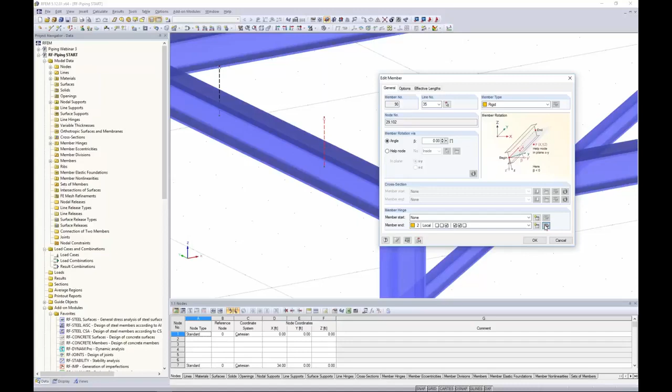What I did was add in a member hinge to the rigid link here to release translation in the global X direction, so that will allow those pipes to kind of slide back and forth in that direction. I also released the moment, so I didn't want any moment transfer between our piping members and the supporting structure, so we can do so with the member hinge on our rigid links.

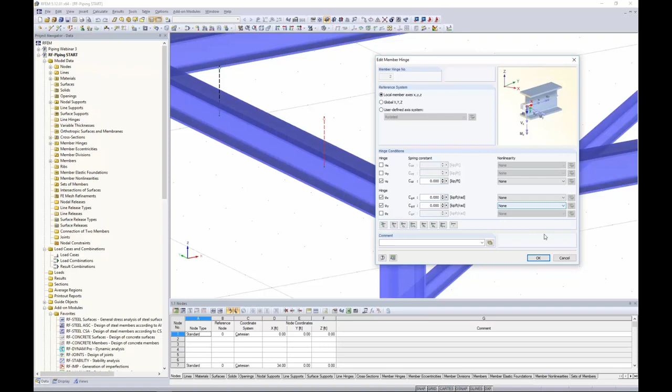Now, taking a look at the rest of the structure, these are just typical W shapes. We can use our project navigator over here on the left to view all of the input data. So for example, the cross sections tree, we can see that the W8x35s are defined for most of our members within this pipe rack. We also have some diagonal vertical bracing, W4x13s. So that's really all that I've done so far.

Now, when you go to create a new model within RFEM, or after you've done, such as I have, created the model, we need to go back into the general data. So what we would do is to right-click on our model name, go into the general data, and under the options tab, you'll notice piping analysis. This option is only available if you've purchased the RF piping module extension.

So here we will check this checkbox, and under the details are some additional settings that we need to define. The first one is to define which standard we like to use. We have the ASME B31.1, 31.3, and recently added is the Euro code. This option down below at this checkbox is for welded forged T and welded in contour inserts. This just refers to a couple variables, RX and TC, that we won't be using today, but just keep that in mind if you are using those type of components.

The default branch connection type, this will make a little bit more sense later on. So for right now, we just want to set this to reinforced fabricated tee, but just keep in mind that this setting is here and I'll mention it later on.

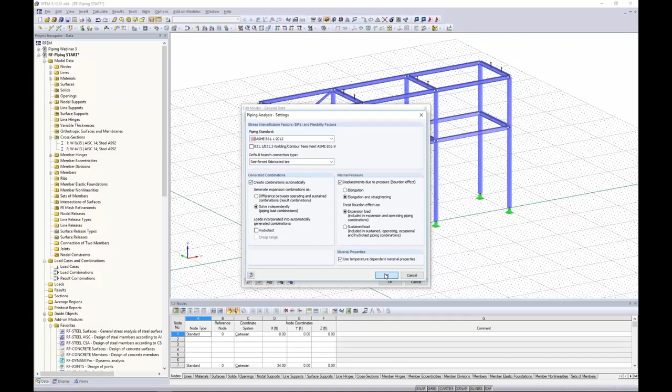When I click OK out of these dialog boxes, you'll notice that I'm still within RFEM, but now I have some additional tools available for modeling piping systems. So we want to begin today by drawing a new pipeline, using this first tool available in our new toolbar. For the pipeline description, we'll call this one main pipe 1, and we need to define a cross-section.

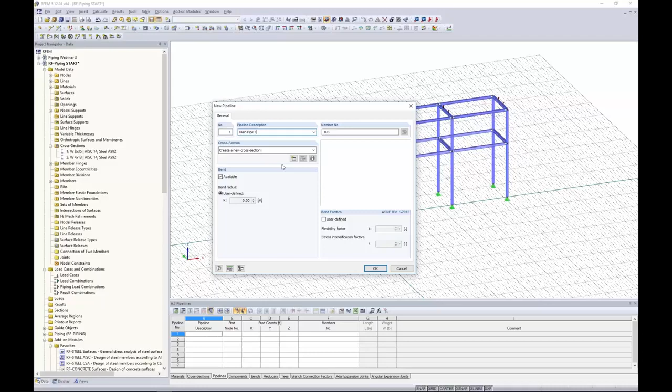With the cross-section, we will go into our database and up pop several different manufacturers and standards. You'll notice that we have the ASME B31.1. We have NPS and DN - NPS is related to imperial units, DN is related to metric. For our first pipe, I want to scroll down to my 8-inch diameter, in particular 8.625, and the thickness of the wall is going to be 0.594.

So I can see my cross-section populated here. If I have any questions about what variables are being used for my cross-section properties, I can open up this info box to see everything listed.

The material is also going to be defined within the same dialog box. Here we will open up our material database. Over on the left we have some filters where we can filter down to the ASME B31.1. These are all the materials listed in Appendix A within the ASME standard, which you can see is quite complete. For today, we will just stick with A53 grade A, and here are all my material properties.

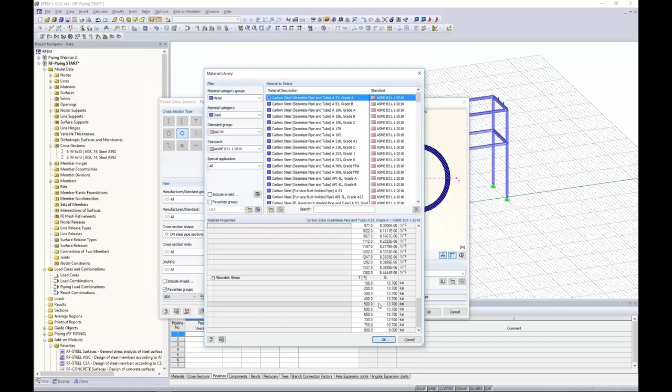This is what I mentioned previously, that as our temperatures are changing, so are our dependent properties such as modulus of elasticity, thermal expansion, and allowable stress. These will actually change with each iteration as long as the temperature continues to change as well.

Now that we have fully defined our cross-section and our material, both listed in that dialog box we were previously in, the line mass here is nothing more than the density of our material multiplied by the cross-sectional area of our pipe to give us our mass per unit length. The total line mass is correlated here just with the line mass we've defined so far, but you'll see this begins to change as we define additional parameters with these other tabs up at the top.

Design data is important because it relates to our pipe wall thickness checks and pressure checks according to the ASME later on. So we want to initially give some design data here that we plan to design this pipe to. For example, if we plan to use a pressure no greater than 500 psi, and maybe design around 85 degrees Fahrenheit, nothing too hot or extreme here.

The second tab is the bend. You can actually create a different cross-section for the bend of the pipeline, different from the straight pipe. This is important for things like thermal temperatures, which create much higher stresses at the bend. So if we wanted to change this cross-section to a thicker wall, we can do so. The rest of these parameters line up just like what we saw in the straight pipe tab.

Layers. We can include layers such as insulation, plating, and lining. For today, we'll stick with applying an insulation, and what we'd want to do here is define the weight of the insulation as 6.37 pounds per cubic foot, as well as the thickness. So we'll add 2 inches of insulation to the outside of this particular cross section.

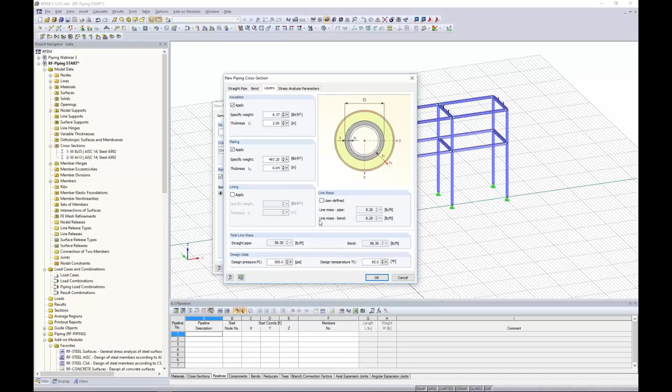We'll also add some plating. For this, the specific weight needs to be quite a bit higher at 497.2, just something that we're given from the manufacturer, and a thickness of 0.04 inches. Now you'll start to see this total line mass increase from what we saw with the first tab because we're accounting for the additional weight from the insulation and the plating.

Stress analysis parameters, well, here you can see there's corrosion allowances, mill tolerances, manufacturing allowances, and welding factors. Again, this is important for when we're checking the pipe wall thickness checks according to the ASME. There are some default settings in here, but by all means, you have control to override those for both the straight pipe and the bend.

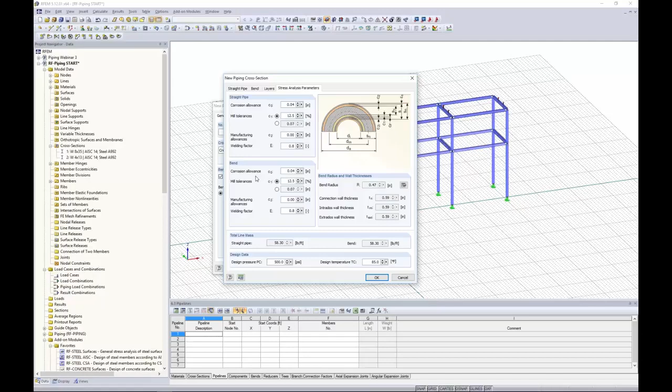Now I can click OK, so we're back to our original dialog box. So we define all the properties for our cross section. Now you'll also notice that we have bend available here. What this means is that as I begin to draw my pipeline back here in RFEM, I can actually automatically create the geometry for the bends. So right now we have it set to the long radius. The bend radius is set to 12 inches. We can change this to short and use 8 inches, or we can choose a user-defined radius here.

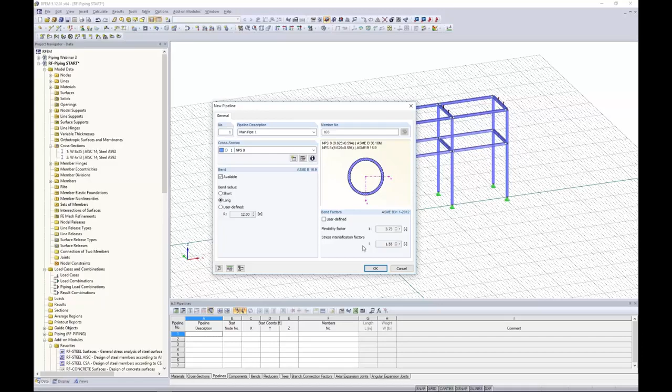The bend factors are calculated from the ASME. The flexibility factor has influence on the bending stiffness of the pipe bend. The stress intensification factor is something that will be used for design later on in our add-on module, RF Piping Design. Again, you can override these with user-defined values as well.

So now that we have defined everything for our first piping member, what we want to do is to begin drawing it. And you'll notice I have these crosshairs available in my graphical interface. What I'd like to do initially is to change the drawing grid around a little bit. So I'm first going to change the plane, and then I can easily select a different origin here, and I'm going to snap to the top of this rigid link.

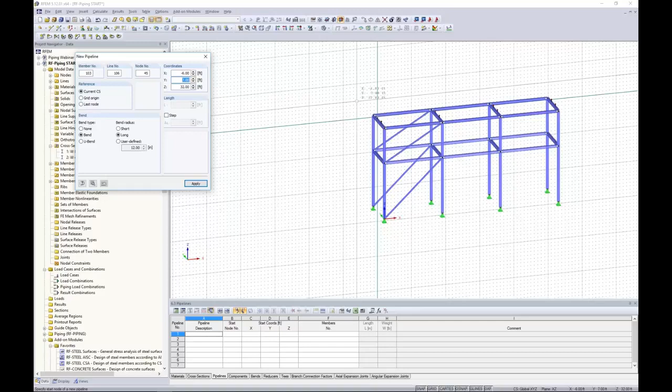So when I go to draw a pipeline, I have a few options. I can choose the current coordinate system, which is what I'm going to do. That will just leave this grid as it is. I can also choose a grid origin or the last node. The last node will dynamically change according to the clicks I make in my model as I begin to draw this pipeline.

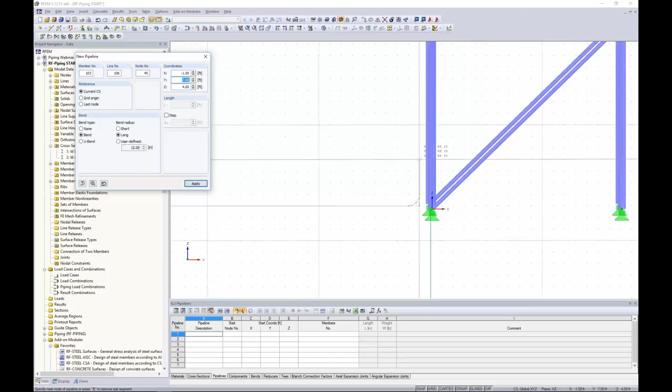So we go all the way up to the top, and we can begin drawing the pipe across the top of the supporting structure. Now, keep in mind that this drawing grid keeps me in one plane, so I don't have to worry about flying off into space anywhere.

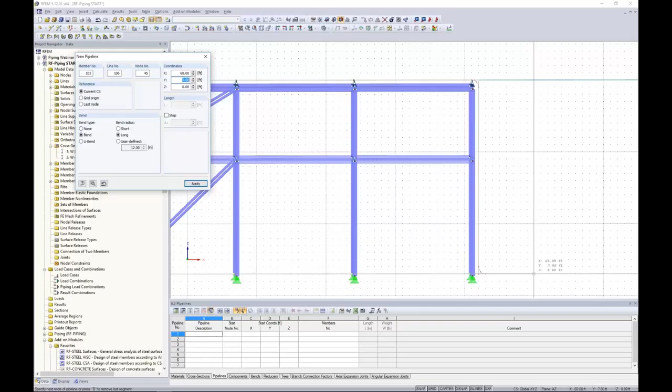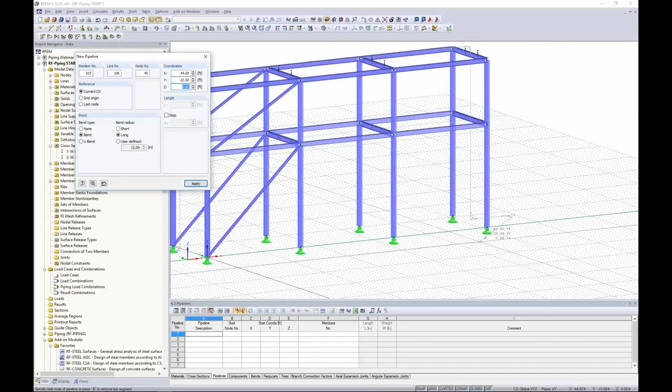Now, when we get to this point over here, what I'd like to take into account is maybe some additional bends to dissipate my heat from my temperature loads. So all while I'm still drawing this same pipeline, I can change my drawing grid back to the XY plane. Maybe I snap back to the bottom of my supporting structure, then I can zoom in and continue modeling my pipeline here with some additional bends.

So once we are done with this, I will make my last final click here, and we'll snap to a point and right click to finish it. And now my piping is complete. So you can see that if everything goes well, you should have the name of your pipe here called Main Pipe 1. That's the description that we gave it.

Now I want to create an adjacent pipe right next to it, and utilizing some of the features within RFEM to make our life a little bit easier, what I'm going to do is to turn this into a wireframe display model. Now I'm going to highlight my important nodes here, the nodes where the bends occur, by holding down my control key and selecting all of these main nodes where the pipe makes some bends.

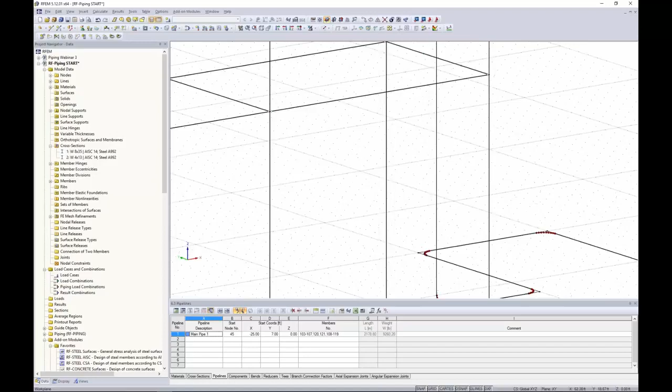So once I have these selected, I can use my Move Copy tool. I'll create one copy and move it -4 feet in the global Y direction. I click OK, and now you'll see those copied nodes are available here.

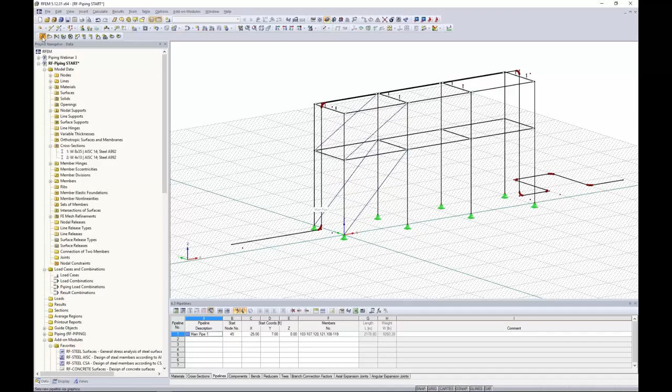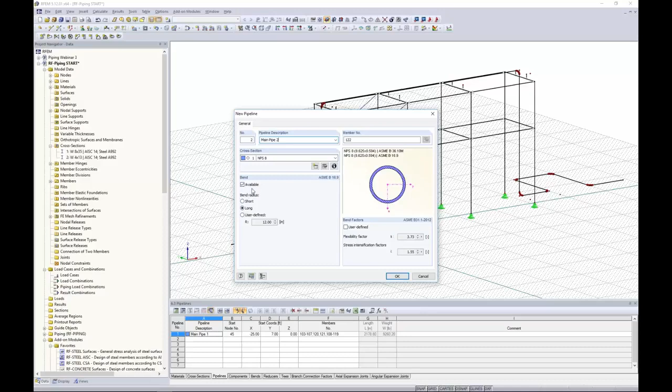Nothing too special. So I'm going to create a new pipeline, and once again this time we'll call it main pipe 2. Now for the cross section, I've already defined that 8-inch diameter pipe with all the insulation and cladding, and that's now available for all my pipelines in this model. So I want to use that same cross section, no need to redefine anything. I'll use the same bend as well, and click OK.

The reason I created those nodes now is that I can easily snap to those nodes here without having to change around my work plane like I did previously. So again, just using some of those special features we have in RFEM to make modeling a little bit quicker, and I right-click to make my last point.

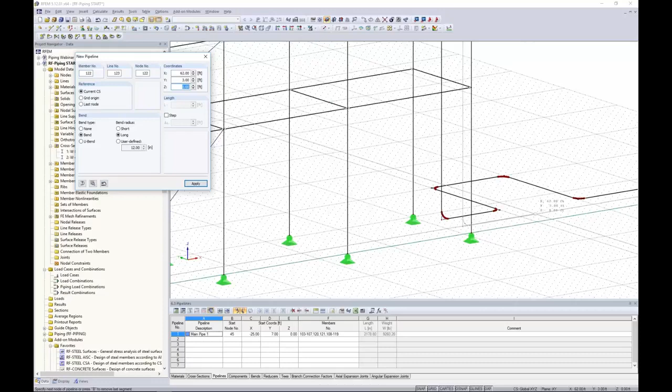Now if I turn this back into rendered view, let's say, oh okay, well this pipe really would like to extend out a little bit further than what I have shown. Instead of redrawing everything, I can take this node and simply drag and drop it so that it's adjacent to my main pipe 1. And again, everything went well.

We see the name of main pipe 2 here. Now the pipes are kind of blending into the rest of the structure, so you can't really tell what's going on here.

Well, under the Display tab in the Project Navigator, this controls everything we view graphically, whether that's input data or our results we'll see a little bit later on. But if I scroll all the way to the bottom, I have this option to change my colors and my graphic according to - right now it's just set to the standard.

We can choose material, cross-section, but we also have pipelines. So when I choose that option, my panel pops up and shows me exactly what my main pipe 1 and main pipe 2 are with different colors, setting them apart from the rest of the supporting structure.

Okay, so what I'd like to continue to do is draw in a couple of straight pipe members, just short segments that frame into this main pipe 1 so we have some intersections. I'm going to go back to the new pipeline - we'll just call this one pipe 1 - and I want to define a new cross-section here.

So up pops our cross-section database. Now you'll notice that we can go back in and filter through this long list. We also can create a favorites group. By activating my favorites group, I've edited it so I've just added the 2 cross-sections I'm using in today's webinar. But you can imagine that if you use a handful of cross-sections quite often, this is a great way to quickly select them.

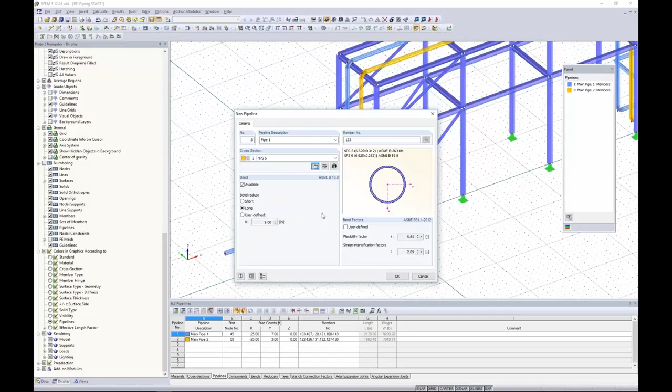So I click OK once more, and I think it's easiest to change this to my current coordinate system and change this to wireframe view. That way I can zoom in here, and my first point I'd like to choose is -15, 7, 0. Then all I need to do is snap to a point which extends out. I right-click - that's my first pipe.

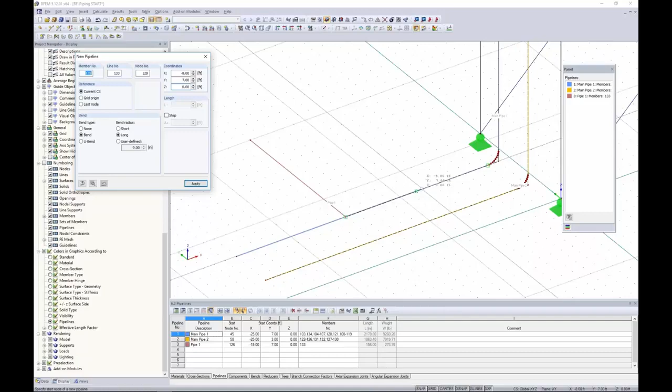Creating once more a new pipeline, we'll call this one pipe 2. I've defined that smaller section, so I always have that available in this particular model. I click OK, and then I can again change this to current coordinate system - that's what I prefer to work with. Here we'll choose -8, 7, 0 and snap to a point out here, right-click. Showing the rendered view, we now see those additional pipe sections shown here, and everything is colored differently so we can tell it apart.

Okay, so now that I have modeled my pipelines, let's move on to the piping components - that was where the rest of these tools will come into play. So the first thing we want to define is a new reducer. When I click on new reducer, the program requires me to click on the pipe that I'm going to apply this reducer to, so I click on this first pipe section here.

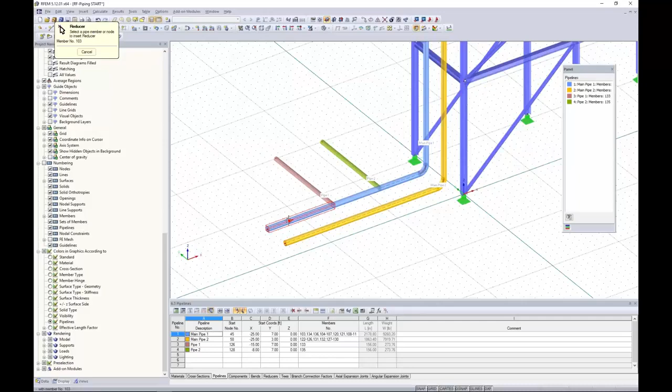Now reducers are used to transition from a larger pipe to a smaller pipe, or vice versa.

Within this dialog box, the first thing I need to define is which dimension to change, towards which node. This is actually opposite of what I want to do right now, so I'm going to click on my beginning node here.

You'll notice my reducer start, perhaps I can choose that smaller cross section we've already defined, or you can create a new section. The reducer end is grayed out because this is going to transition into the pipe I already have defined.

What I do need to define is where this reducer starts. So we'll start at about 48 inches from the start, and you'll notice this big red arrow pops up exactly on the pipe of where we're going to apply this reducer. The length can also be applied at 12 inches, and there's our second red arrow showing us where the reducer end is.

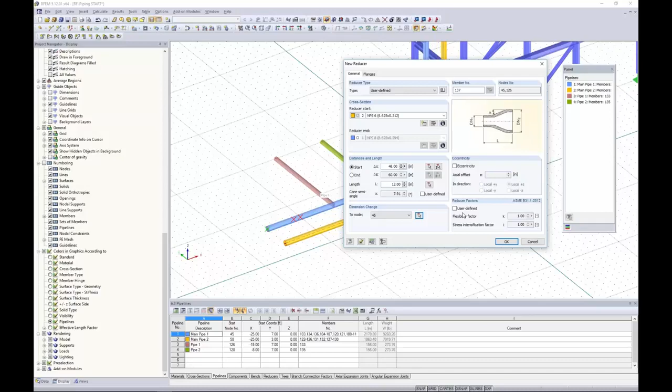You can also define an eccentricity here. Eccentricity would be useful if you want the bottom of the pipes to be flush. In our case it doesn't matter, so we'll keep this as is. Again, the reducer factors can be overwritten here if you'd like to do so.

Now, for a lot of these components, we do have a library. Unfortunately, this library is more relevant to Eurocodes and European manufacturers. This is something we do plan to implement for some U.S. manufacturers in the near future, but for now it's easy enough just to set this as user-defined.

For flanges, this is where maybe we would weld flanges to our pipe and bolt them together at this reducer location. Now, I'm not going to apply flanges, but we'll do this plenty more times with other components today, so that will be more clear in just a minute.

And I click OK. Now if we zoom in, we can automatically see that reducer applied here with the smaller pipe section on the left.

Moving on down our list here, we have three options for valves: a two-way valve, a three-way valve, and a four-way valve. Pretty self-explanatory - a two-way valve is used for two pipes connecting together, a three-way valve is an intersection of three pipes, and a four-way valve of four pipes.

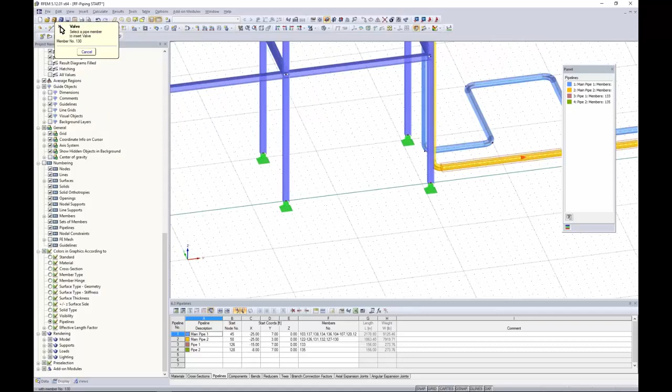So starting off with our new valve, just two-way, we're going to move to the other side of our model, and in particular main pipe 2, we're going to select this pipe here. So up pops our dialog box for a new valve.

Now again, we just want to specify where this begins, so we'll start at 12 inches from the member start, indicated by my red arrow here. The length will be 12 inches, and we have some parameters here that are automatically created, such as the multiplier of the insulation mass set to 1.75.

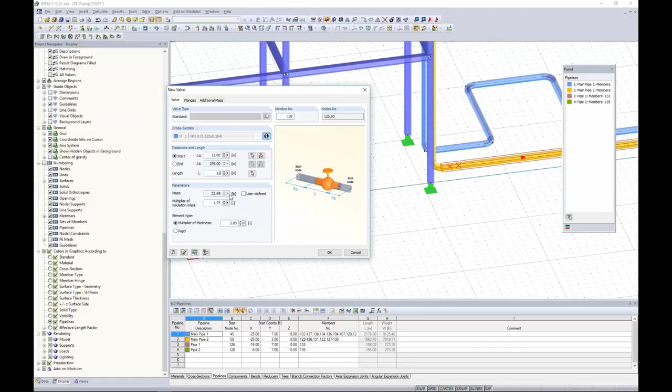The multiplier of thickness is set to 3, so you can override those. That ultimately affects our mass here, or you can set a user-defined mass as well.

The flanges - this is where maybe I do want to apply some flanges. We're going to plan to weld those flanges to both the valve and the pipes and bolt them together. So for our flanges, we want to check the checkbox that those are both available.

Our nodes are automatically generated here of where that flange is going to occur, and we can simply define the mass of our flange as 16 pounds, and maybe the nominal pressure is 232. Again, this is just information that we would get from a manufacturer.

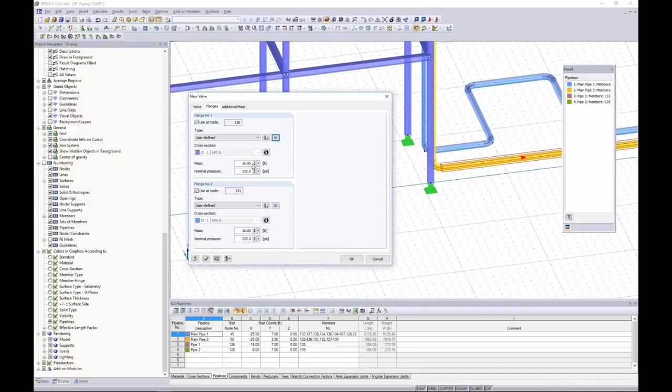What's also nice is that I don't have to re-enter this information, but yet I can just set to all. This will automatically populate the same flange settings for my other node.

Now, the additional mass tab here is useful for our hand wheel if we have an additional mass we'd like to take into consideration, as well as the eccentricity away from the original flange. So something to keep in mind there.

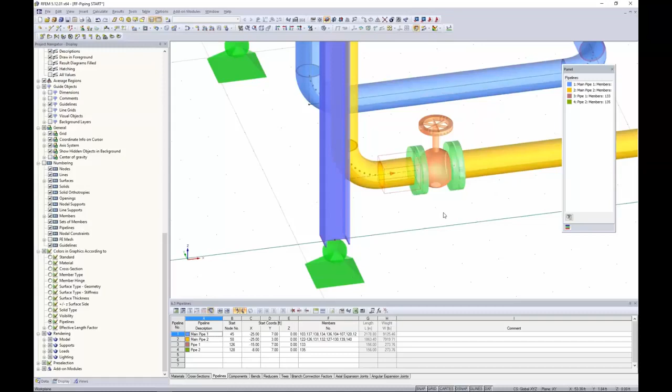Now, once I click OK, we can see here that flange is automatically created visually and will be taken into account for stiffness, for analysis, and for design. So that makes sense for our two-way valve.

Now, in a similar sense, we will apply a three-way valve. So for a three-way valve, instead of selecting a pipe, we have to select an intersection. I select this first intersection here where we have pipe 1 framing into main pipe 1.

The cross sections are automatically generated according to what we have modeled in RFEM, and we want to give it a length for all three piping components here, 12 inches.

Again, our red X indicates where that occurs. Parameters, same thing that we saw within the two-way valve. We have a multiplier of insulation mass, multiplier of thickness.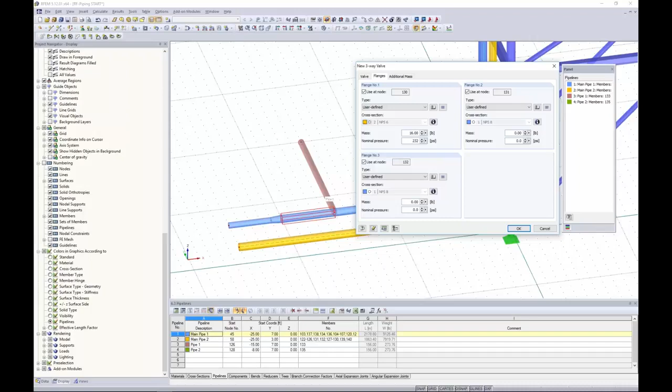Our flanges here, we do want to create flanges at all locations. Again, this will be 16 pounds, 232 psi. Now if I try and set this to all, you'll notice that nothing happens for my other two flange entries. The reason why is because we have a different cross-section defined here.

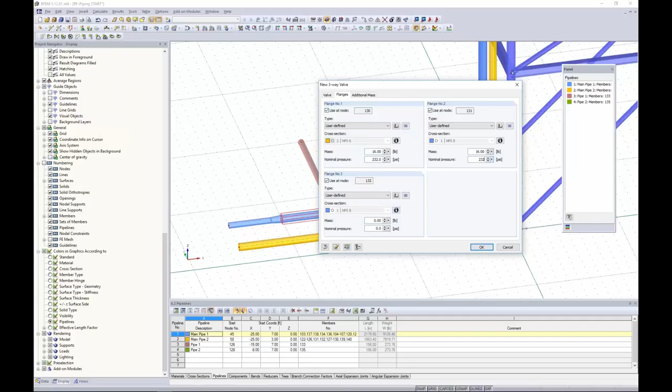The program will only automatically assign the flanges to the same cross sections. So if I move over to my 8-inch diameter pipe and I type in 16 pounds and 232 psi, and I click equals, that will set the flange for the third node automatically.

And again, the additional mass can be considered with the hand wheel here. So once I click OK, then we should see that three-way valve generated graphically. So that's what a three-way intersection would look like.

Now, four-way intersection, same concept. We don't have any intersections of 4 pipes here, so we won't be applying that today.

Right next to that is the new bend. A new bend is useful had I not created, to automatically create the bends when I drew in my pipeline. So perhaps these two elements here, these two pipes connected at a 90-degree angle, and I wanted to go back in afterwards to create that bend. You can always do so with the bend tool up here, define the radius, define a different cross section if you'd like as well.

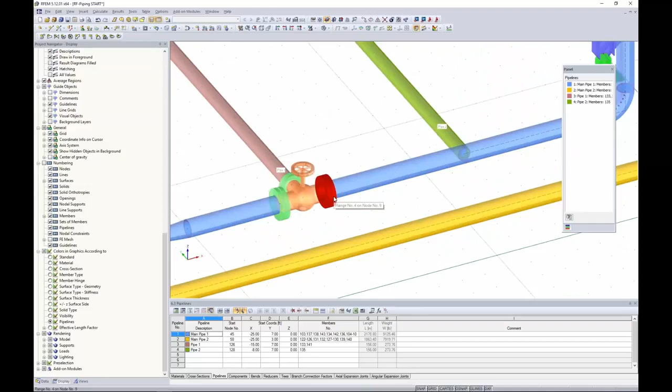Next to that is a new flange. This has nothing to do with some of these other components, but you can purely apply just a flange to any segment of a pipe. This might be useful if you have 2 extremely long pipes and you would like to add in a break there and they're bolted together with a flange. You can do so by adding in that flange.

We also have a new blind flange. This would be able to block nozzles and piping ends. So for example, we could add a blind flange here at one of our piping ends.

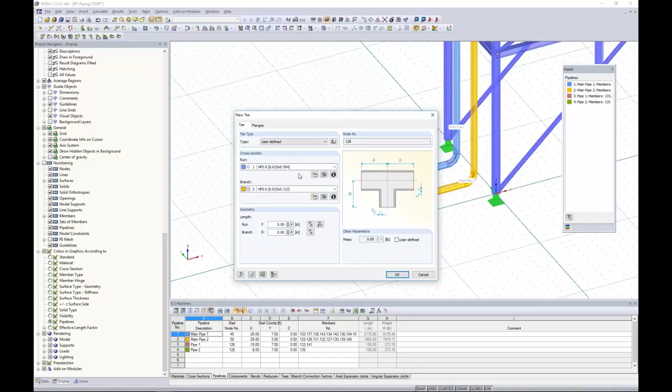A new T. So a new T would be an intersection of 3 pipes, such as what we see here with our pipe number 2. Nothing too fancy with this. We have the cross section defined with the run. The program automatically assumes that's our 8-inch pipe, and the branch is going to be the smaller 6-inch pipe. Then we just simply define the geometry, and again we can add flanges here.

For our case, instead of doing this, I'm actually going to apply a new branch connection. So again, I click this intersection. Now with the branch connection, remember back in the general data, I said that we had to set a default option for the connection type. Well, that's where this comes into play.

So we set the reinforced fabricated T so that automatically when I jump into this dialog box, this is what will always be automated. Now if I use something else quite often, then you probably want to go back to the general data and change that default value. You can always come in and individually select them as well. So for us, we're going to choose a reinforced fabricated T.

All of our cross-section dimensions and factors are automatically calculated here, but what we do need to define is the thickness of our reinforcing pad or saddle thickness. This is important to just give the pipes some additional reinforcement here or thickness at maybe where we have some high stress locations. For today, maybe we put in here a 1/4 inch thick saddle thickness and weld that directly to our pipes. Once that's done, I click OK.

Now this is indicated graphically with just a ball at that intersection. As far as the other 2 options here for axial expansion joints and angular expansion joints, I will get into that later after we do design. So for now, we'll continue to move on.

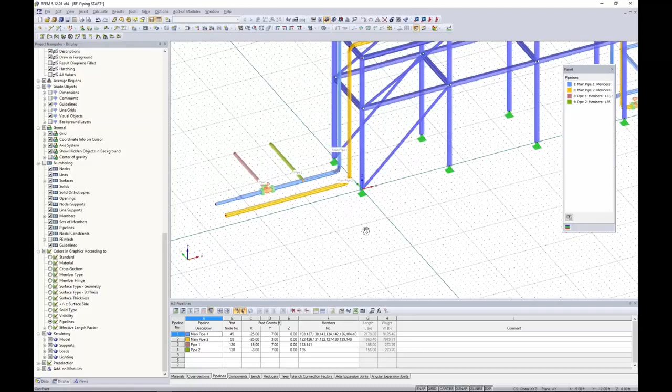So before we can start loading our structure, we need to support it. Just like we support our before we begin loading our piping members, we need to support them. So just like we supported our supporting structure here, you can see at the bottom of the columns we have nodal supports. We have to do the exact same thing to our pipe elements. So we don't have any additional features for supporting the pipes. It's just what you would use in RFEM for all the rest of your members as well.

So in our case, we want to create a new nodal support. Now with a nodal support, we have 6 degrees of freedom, 3 degrees in translation, 3 degrees in rotation, that we can fully fix or fully release.

We also have a spring constant here. So if you have something that's not fully fixed, not fully released, but somewhere in the middle, you can define a spring constant and you'll have partial fixity.

Lastly, we can define nonlinearities. It's not uncommon that for a piping support, you have some type of friction support, dependent on your normal forces. You can define all that with the nonlinear capabilities within the program. I'll repeat this again, but the nonlinear supports is something that cannot be taken into account with result combination, so just keep that in our heads, but we'll revisit that later.

So for today, we want to use just a typical hinge type application, one of the default options within the program. I click OK. So what I'm going to do here is simply click at the ends of my pipes to support those with that basic nodal support.

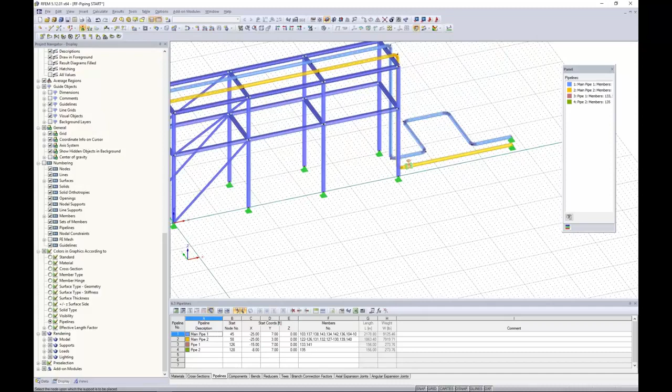In a similar concept, going back to my nodal supports, I'd like to define a new definition, and this time I want to fully release it in the X direction, so some type of roller support that allows translation in the global X direction. I click OK, I click OK.

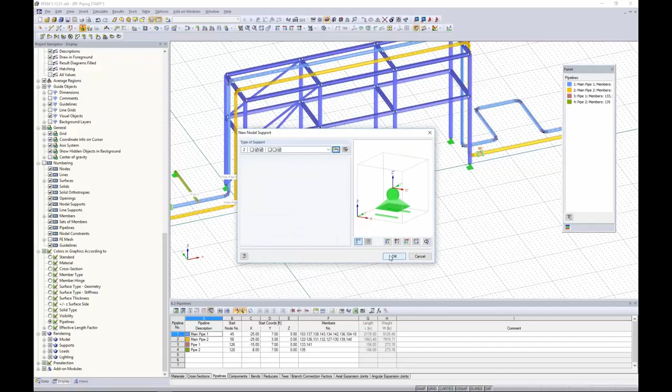So now for this type of support, I'm going to turn this into wireframe view and zoom in here. These will want to be applied right at the bends of the pipes. Now I'm not applying it at this node, which kind of indicates where our bend occurs, because this node doesn't technically lie on the piping member. We need to apply it directly on the pipe.

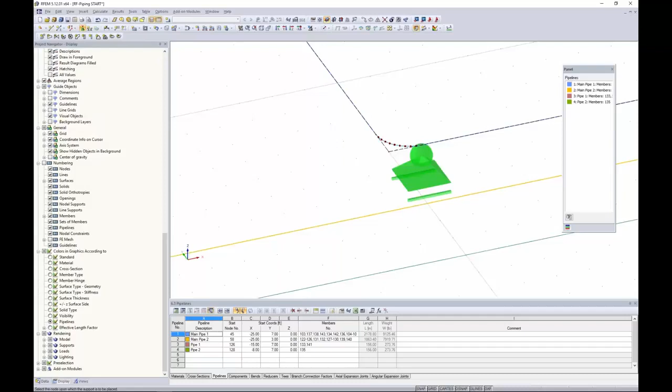So for this, I'm just going to highlight these nodes right at the bends on both sides. And once we've completed on the right side of the structure, we'll zoom in to do this on the left side.

Now, once more going back into the nodal support, because I've defined these new nodal supports, I can always select them within my drop-down box here, but I want to create one more definition, and we're going to release this in the global Y direction. So this will allow movement in the global Y as a roller support.

I click OK, and that's where we want to apply this to our pipes up here where we added in these additional bends. Okay, so now our structure, including our pipes, are fully supported.

What I'd like to move on to now is loading of the member. So for this, we want to create some additional load cases. I go to add a new load case, and up pops my load cases and combinations dialog box.

Now, for those of us who are familiar with RFEM or structural design in general, we of course have action categories according to ASCE 7 or the NBC, according to live load, dead load, wind load, and so forth. But when you have the RF piping module activated, you'll notice several more action categories available here for our piping load combinations, such as piping self-weight, fluid, pressure, snow, wind, even cold springing, hanger, hot loads, and cold loads.

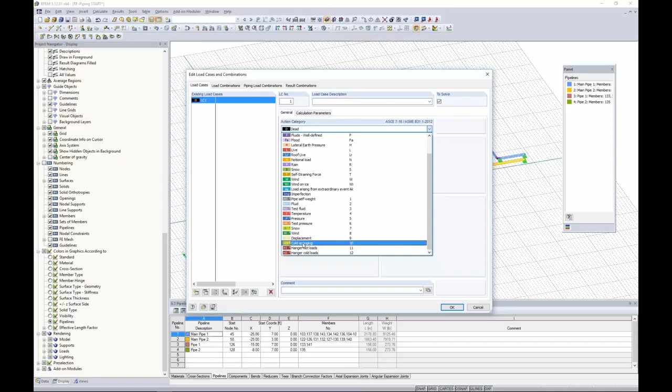So for our first load case, we will define a pipe self-weight. We'll give it the name pipe self-weight. The self-weight will be activated here with this checkbox as -1 in the global Z direction.

Now we create a new load case. We uncheck the self-weight because we don't want to account for that twice. This one will be for fluid, and we'll call this one pipe fluid.

We create another load case. This time we will name this one temperature 1 and assign the appropriate action category. I can make a copy of these as well, so now all I need to do is redefine temp 1 to temp 2, creating another load case such as pressure, and we'll call this one pressure 1. Making a copy, we'll call this one pressure 2. So now all of our load cases are complete.

I've applied no loads, but I've just defined the load cases that eventually those applied loads will fit into. So now I want to take a look at my piping load combination.

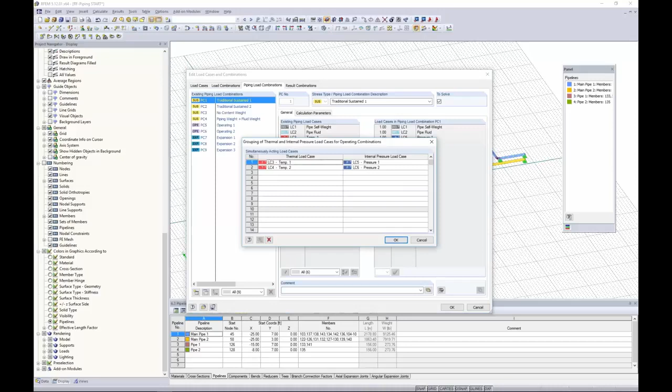So when I try and click another tab, I automatically get this RFEM question. It tells me the load cases were changed. Not all internal pressure load cases have been assigned to corresponding thermal load cases. Do I want to do this now? Yes, I do. So now up pops an additional dialog box, which simply assigns my temperature load cases to my pressure load cases.

Now the program makes some assumptions here, but if I don't like these assumptions, I can always use my drop-down to make changes, or I can add in some different combinations here. So that's important for our load combinations.

Under the piping load combinations, we see some automatically generated load combinations, such as for sustained, for operating, and for expansion. These are the various stress types, and they are incredibly important because this tells the program, once we get into design a little bit later on, exactly what load combinations to use in each of the particular sections of the ASME code for our stress checks.

Now, had I chosen to create these load combinations manually, I still need to assign a stress type. Again, it's important for our ASME code design later on.

When we take a look at the sustained, take a look at self-weight, pipe fluid, pressure, maybe no content weight is just the self-weight. We also have the operating, which is going to be all 4 load cases acting at once.

Now we get into the expansion load cases, and this is something that is very important and relies on our settings and our general data. Remember how I said we're not going to create result combinations, but rather we're going to create only load combinations. This has to do with these expansion loads.

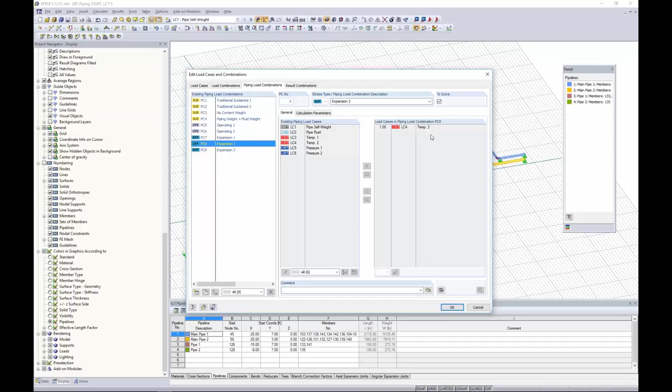When I take a look at these expansion loads, they are nothing more than just the temperature loads applied. So then I'll be doing my expansion stress checks within the ASME according to just simply this temperature load applied.

In turn, what I'd like to show you is if we go back to the General Data tab, under the data, we scroll up to our name, we right-click under General Data to go right back into where we started. Here, I'm going to quickly change this to result combination. Now remember, material nonlinearities cannot be taken into account accurately, so you'd probably want to uncheck this if we're using result combinations. And I can click OK.

So going back into my load cases and combinations, looking at my piping load combinations, you'll notice my expansion loads are now gone. Those load combinations are not being generated here, but rather they're now under the result combinations. So how is this different? Well, it's still called the same expansion 1, 2, and 3.

But now when I look at the details of this, what's happening here is I'm taking my load combination PC5, which is my operating 1 load. I am subtracting out, indicated by this -1 sign, PC1, which is my load combination for traditional sustained.

So to make this a little bit more clear about what's going on, let's go back to our piping load combination. We're taking PC5, which is all 4 load cases applied at once. We're going to get the stresses and everything from this. Then what we're going to do is subtract out the internal forces and in turn the stresses that are generated from this traditional sustained, which you'll see is all 3 load cases, but temperature is not included. So all we're left with is just the stress generated from the temperature.

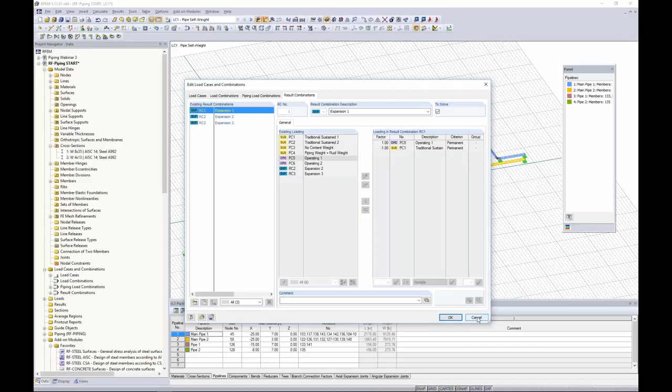So for today, what I'm going to do is go back into my general data. I'm going to change this back to solving independently because I am using my temperature dependent material properties. Okay, so now that we have these load cases defined, you'll find those in our drop-down box available up here in our toolbar.

We want to begin loading the pipes. So we'll start off with pipe self-weight, we'll just leave this as is. We won't apply any additional loads. Now the piping fluid. What I'd like to do is select all my members to apply the piping fluid to. Right now it's kind of confusing with my supporting structure.

Under the Views tab, we have some generated views that, as we began to model, the program generates these. One of those options is the pipelines tree here.

So what I can do is check this checkbox, and now my supporting structure I can no longer select - it's not visible. What I can do is make changes and select all of my pipelines. So that's a useful feature, this Views tab, if you're looking to highlight various options within your model.

So I'm going to highlight all of my members here and apply a new member load. Member load is exactly what you think of it - we can apply a force along a member, but for this particular application today for our pipes, we want to go under extra. Under extra, we have the option for pipe content full, where we're assuming the pipe has all of the fluid contained fully, it's completely full, and all we need to do is give it a specific weight.

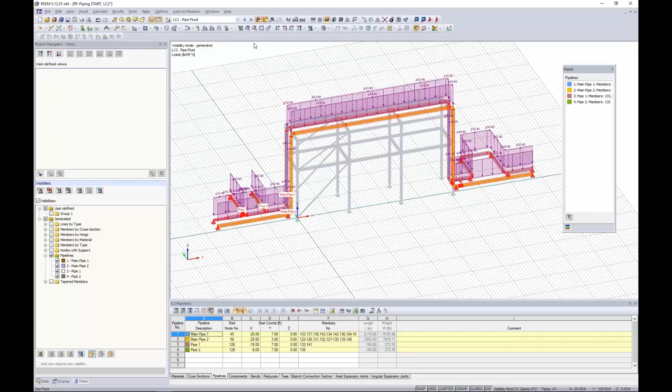I click OK, and now visually I can see this load being applied to all of my members here. Now I changed my load case up at the top to temperature. My members are still highlighted, so we go back into our new member load and apply a temperature - here we specify perhaps 65 degrees Fahrenheit, nothing too special, and I click OK. Graphically we can see this temperature load applied to all of our pipes.

Moving on to temperature 2, same concept - all I'm going to do, since the program remembers my settings from last time, is change this to 85 degrees. Again, nothing too extreme with our temperatures for this example today.

Pressure, again a member load - under extra we have the option for pipe internal pressure. Here you can see an outward force will be acting from the interior of our pipe, and we just need to define a magnitude. This first pressure will be 145 psi. I click OK, and just like before, I can now see that 145 psi applied to all of my members. Lastly, one more load for pressure 2, just changing the magnitude here to 218 psi, and I click OK.

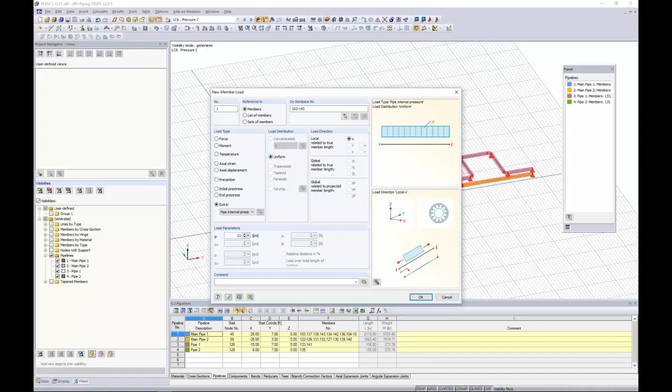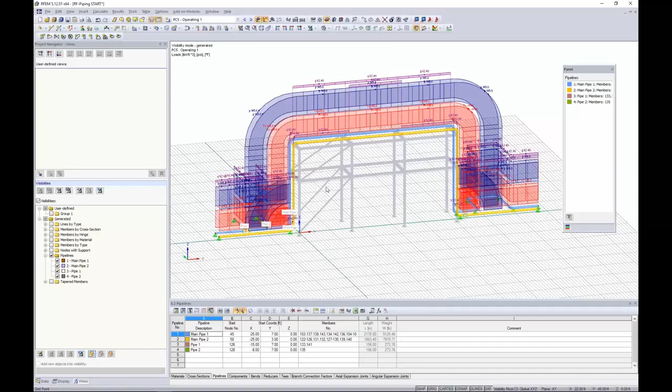So now these loads are done, but what's nice is that not only can I scroll through my load cases, but maybe I'd like to take a look at some of my load combinations. For example, operating - this is with all 4 load cases acting at once. So I can see those loads stacked on top of one another and exactly how they're going to be applied visually to my particular members.

Okay, so now we're ready to run a design for the ASME. We've fully loaded this structure, fully supported it, and added in all of our piping components. Everything looks to be good.

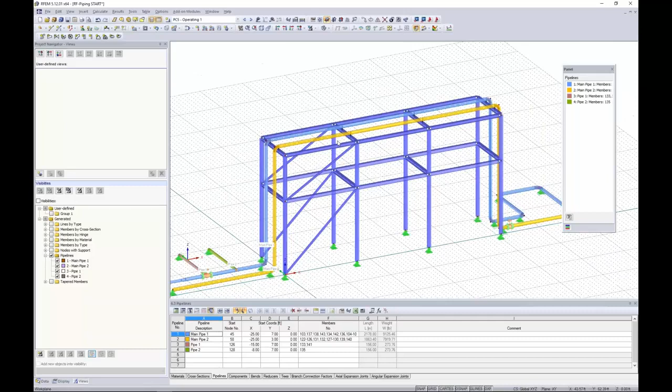So now what we'd like to move on to is back under our Data tab. You can see here our long list of add-on modules, and in particular we would like to be in RF Piping Design. Now any one of these modules you can right click and choose to be your favorite, to move it up to the top of the list. So we're going to launch RF Piping Design, design of piping. Now this is just a simple dialog box - those of us familiar with RFEM, this module looks like all the rest of them.

So what we would like to first define here is the pipelines to design. I can simply select my all checkbox, so now we'll design pipes 1 through 4.

Now the standard can also be selected, not here but back in the general data tab. So this is a little bit different than some of our add-on modules - that standard has to be generated within the general data. We did select B31.1. I'm going to move all of my load combinations to be considered for piping design, so you can see here my sustain and my expansion loads will be utilized appropriately within the ASME.

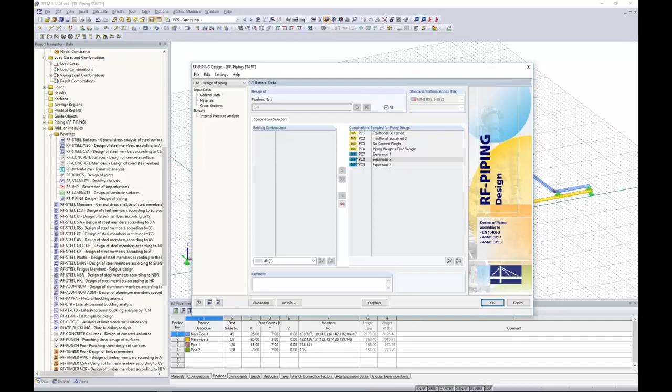Now moving on down the list, I have my materials - this is my A53 brought in from RFEM, so I don't have to redefine that. What's further defined though are just some of those material properties if I'm curious to see those again.

Cross-section, same concept. Those are brought in directly from RFEM. I don't need to do anything further with these here. Here are my cross-section properties given to me again.

Now, you'll notice that I actually have results available even before I've run a calculation within the program. So this is checking our wall thickness and our pressure, doing a couple checks from the ASME, all again without running a calculation. So how is this possible?

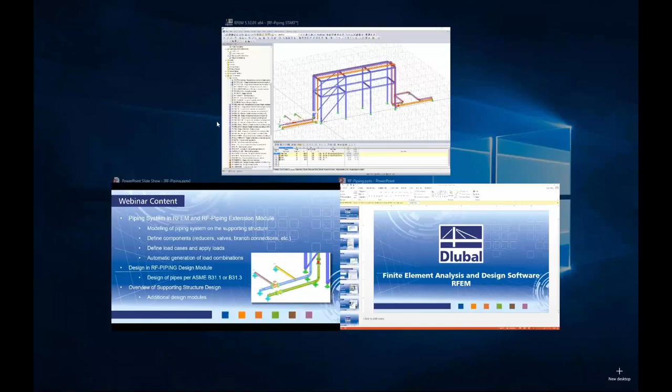Well, for this, I want to jump back to the PowerPoint. This section within our RFEM add-on module is called Internal Pressure Analysis. It refers to the ASME B31.1, section 104.1.4. This allows us to check the minimum wall thickness for pressure and temperature. So that's what these equations are given within the standard, equations 11 and 12 at this section.

Now there's 2 equations here, so we have some variables that we're looking at. Now the first variable, P, is going to be referred back - remember when we created our cross-section and I said, let's give a design pressure here. So this is what I'm telling the program: I plan to design this pipe for 500 psi or less. That value, this design pressure, is going to be utilized within these equations, P.

Now we also have some other variables, capital D sub naught, that's going to be our outer diameter, and we have smaller d, which is going to be interior diameter. So that's why there's 2 separate equations here.

We also have SE, which refers to the max allowable stress based on our material for our particular pipe. We have a couple other variables, W and Y, which is the weld strength reduction factor and the coefficient directly from the standard. Both of those are dependent on temperature. So again, this is why we defined a design temperature, because these coefficients may change as well as some other parameters depending on what our design temperature is.

So we cannot exceed this max design pressure, which will double check that to what you have entered in here for your cross-section parameters. So those checks are kind of going on here within RFEM, our add-on module, before even running the calculation. You'll notice here I have both my 8-inch section and my 6-inch section. We will check it for both the straight pipe and the bends, because there are different checks for bends as well. We give you the code references.

So here you can see the wall thickness check, we have a ratio for that. We also have our design pressure check. So we will check both of them for you before running that calculation.

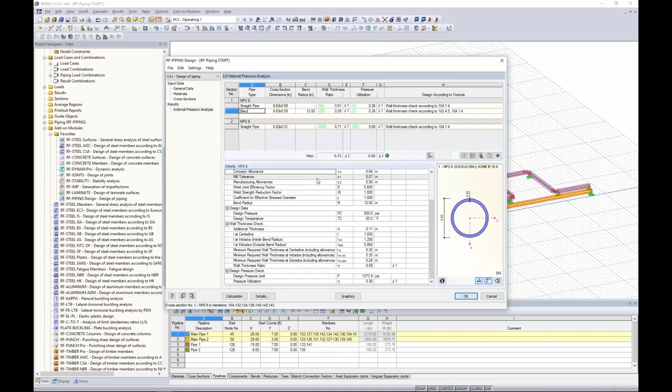Now, before moving forward with the rest of these stress checks, I want to visit the details button here, which brings up our additional detail settings. So most of this is just some further details that we specify according to the ASME, such as the number of thermal cycles. Now, we always give a code reference here, so you can quickly look that up in the ASME B31.1 to understand what exactly am I setting here.

The occasional load factor K, you can see here we have some different settings. 1.15 is going to be used for loads acting for less than 8 hours and less than 800 hours per year. 1.2 would be used for less than 1 hour and less than 80 hours a year, and 1.0 would be the most conservative. We use 1.15.

Corrosion allowances, we have two options with this. So those corrosion, mill, mechanical allowances can either be applied to the stress calculations according to the standard, so whatever the ASME tells us to apply it to, or to all stress calculations, which, as the program tells us here, is a more conservative approach.

Couple more stress options. Again, we can just refer directly to the standard to take a look at these. We'll leave them as default. Something recently added is hoop stress, calculated using either the inner diameter, but you can see that we also have the drop-down box to use the mean diameter or outer diameter.

We'll just leave this as inner diameter. Now that we have defined those details, we can move forward with our calculation to see if everything will hopefully work okay this time.

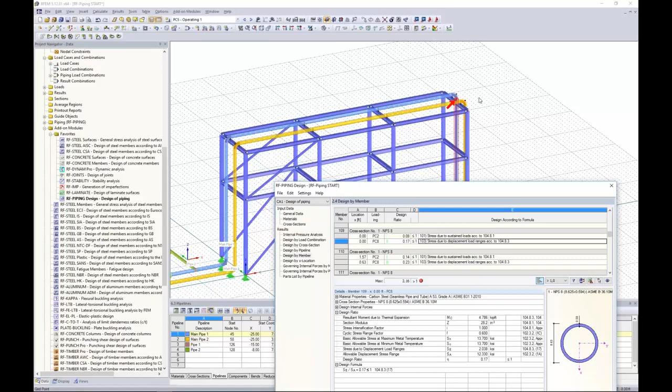This big red arrow is going to show you exactly where the controlling internal force for that particular stress is located. Maybe in our model today not so helpful, but with a very large model, this will be extremely helpful if you're looking at this big giant table and want to get an idea of where you're at within your structure.

We also have a parts list by pipeline material takeoff.

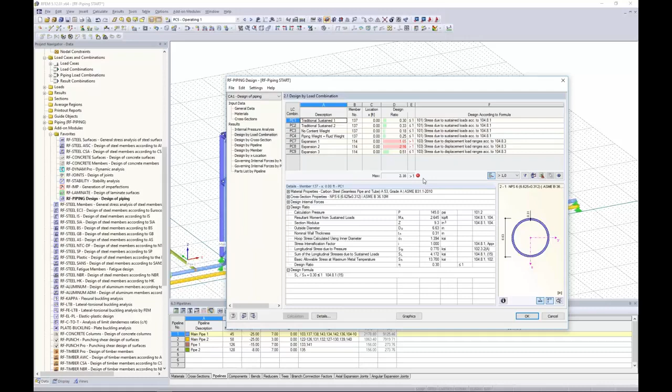So when we go back to design by load combination, you'll notice here we have some red numbers, and I have a big red sad face because I am above 1.0. So there's obviously something I need to address in terms of my temperature stresses and the stress checks related to the code.

So the tables are nice, but I'd like to move into the graphics back in RFEM to see exactly where this is occurring. We can choose the graphics button here.

Now, when I go back into RFEM, I'm technically still in this add-on module. I'm just viewing the results graphically back in RFEM, and you can see this with our drop-down box here. Right now I'm showing the design ratios along the pipe members.

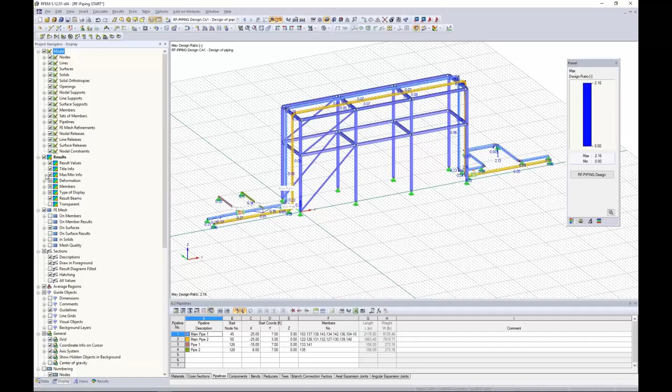Now I can't really see what's going on, but remember under the display tab I mentioned that everything we view here graphically is controlled within our display project navigator, even the results. So under the results tree for members, I can change this to a few different options, one of them being cross sections.

Now I have colored cross sections that I can scroll along the pipes to see exactly where my problem occurs. Well, it looks like these two bends here are a big problem when it comes to our temperature loads and stress designs. So I need to do something with regards to that.

That's where I mentioned that we would go back into an expansion joint. Although I'm still technically in this piping module, just viewing my results, I can still make changes in RFEM because I'm still concurrently in RFEM.

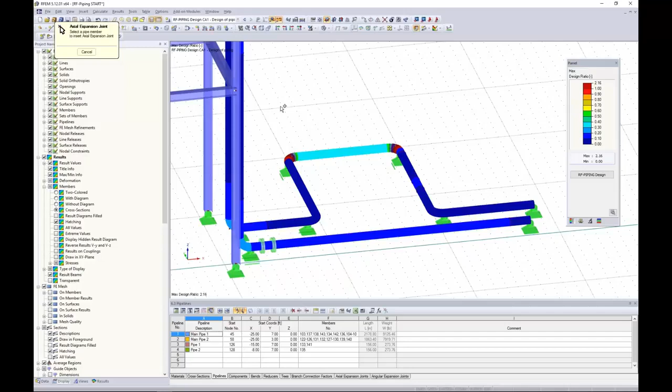So what we're going to do is add a new expansion joint. I just need to select the pipe I'd like to apply it to. Now for this, it looks like the other dialog boxes that we saw with our components.

Here is where we're going to add in a distance, or actually we'll start off with the start location. We'll start this off 12 inches from the pipe start, indicated by that red X once more. Now the length will be 12 inches as well.

We do need to give it a mass of, let's say, 20 pounds, as well as an axial stiffness. For this, we might get the information from the manufacturer that it's 150 pounds per inch.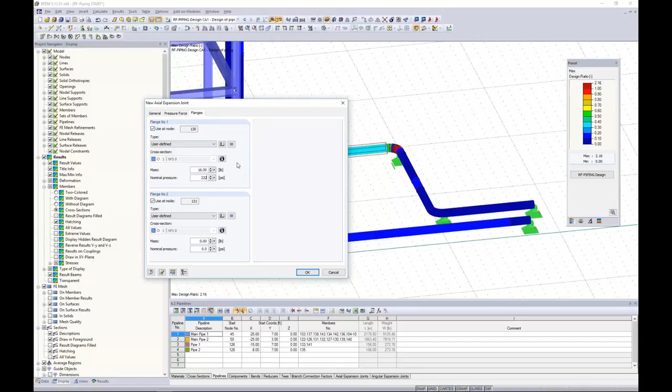Now for the flanges, I want to apply just our general flange of 16 pounds, 232 psi, to both nodes. Once I click OK, it'll ask if I want to clear my results - that's fine. And here is my expansion joint that was just generated.

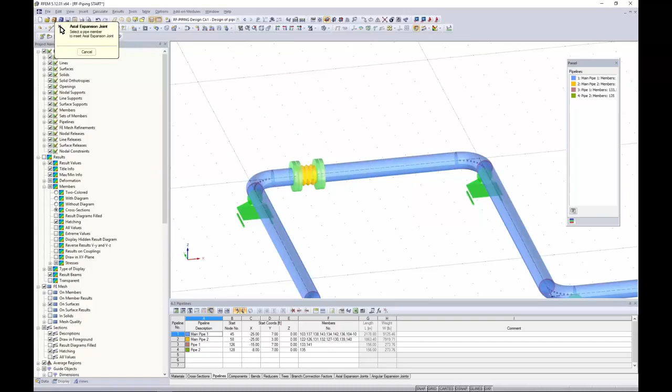Now, it's quite common for expansion joints to be added in pairs. It's not so common for them to be added individually. So maybe we want to quickly add a second expansion joint. We'll add that to this new piping member that was created here.

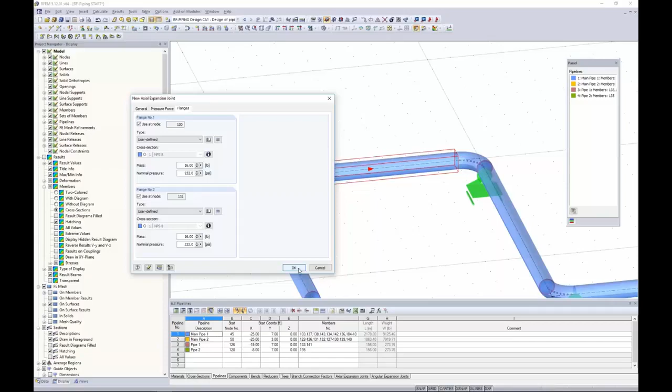Everything is the same except now I want to choose to start at 12 inches from the member end. Flying through this other information: the length will once again be 12 inches, the outside diameter is 10, the corrugated length is 10, and the mean diameter is going to be 8 inches. The mass was given to us by the manufacturer - 20 pounds, with a stiffness of 150 pounds per inch. For the flanges, we will apply our 16-pound flanges, 232 psi, to both nodes and click OK. So now we have our second expansion joint added here.

So what we'd like to do is rerun those calculations back in our piping module. Right now our drop-down says we're in RF piping design. I can always go to my add-on modules and go to my current module, since that's currently selected. So we'll rerun our calculation here, cycling through the load case combinations, now with those expansion joints added.

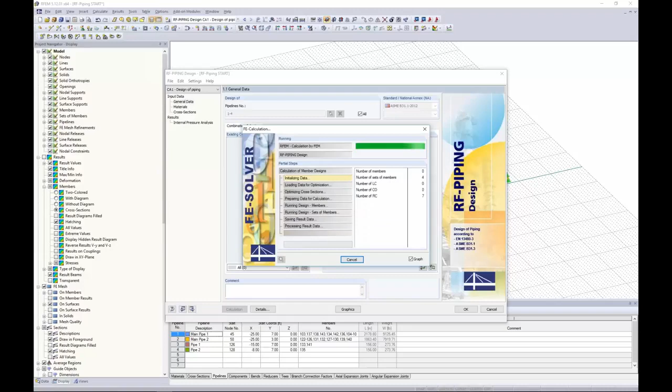So now we can see here that the overall code check was decreased significantly. By adding in those expansion joints, we've now decreased the stresses in those bends. Keep in mind, if I make any changes to the cross-section or the design pressure temperatures of my cross-sections, I probably want to go back and double check this internal pressure analysis to make sure everything is checked - these are two separate checks.

One additional thing I want to point out that's really strong with our program versus others is that for all of these checks, we give you all the code references along with the variables. For example, looking at one of these expansion checks, in our additional information down here we have all the variables that went into play along with the code references for those variables and how they're calculated - remember stress intensification factors, things like that. The design formula is even given down here according to section 104.8.3, equation 17.

We can even expand some of these trees here to get our design internal forces and cross-section properties. We want to be very, very clear to you as a user where your numbers are coming from, rather than being a black box. You can always export all this design information back into Microsoft Excel for further sorting as well. So pretty powerful in terms of our data output.

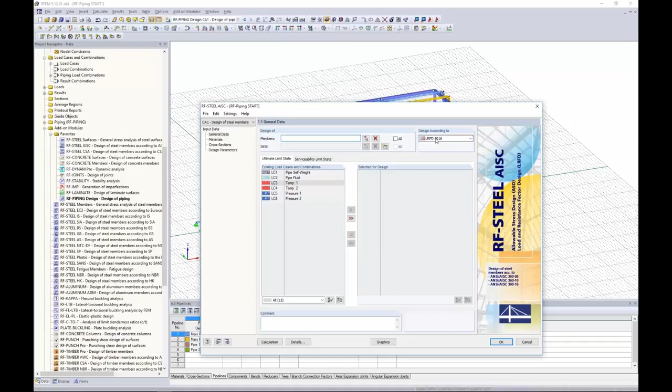Now this add-on module looks identical to what we were just using with the piping members too - so again, once you learn one module, a lot of the modules are set up the same. Then we could design according to the AISC 2016 standard if we choose to do so. The point being that you can design both the supporting structure and the piping members all within one model, so you can take into account that interaction.

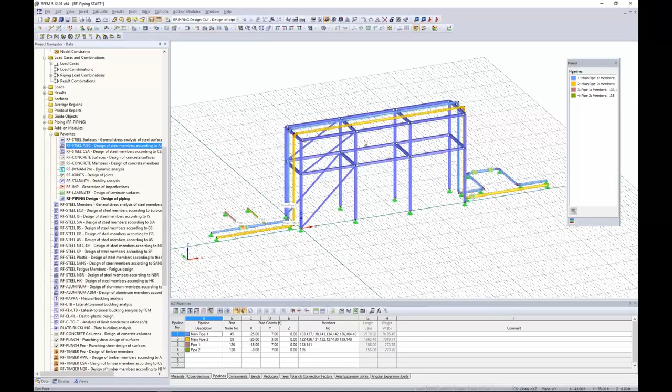I do have further webinars that go into much more detail on only steel design, for example, and you can find those on our YouTube channel or on our website, so I won't have time to get into that today. Now, lastly, I want to touch on our printout report.

So let's assume we have these loads that we've applied to our piping members, and we'd like to quickly add a picture of this to our printout report. We're ready, we've done the design, ready to submit these for review. We have this nice feature to print a graphic. Typically with print a graphic, you'd have to individually change your load case, print it off, come back in RFEM, change it, print, and so forth.

We have this option called mass print. Under mass print, the program has already populated what I'm currently looking at, assuming I want to print this off. With mass print, I can select to print off all load cases and combinations, so I'll get a view of all those different loads printed off at once. I'm going to use 50% of the page height. That's great, I click OK.

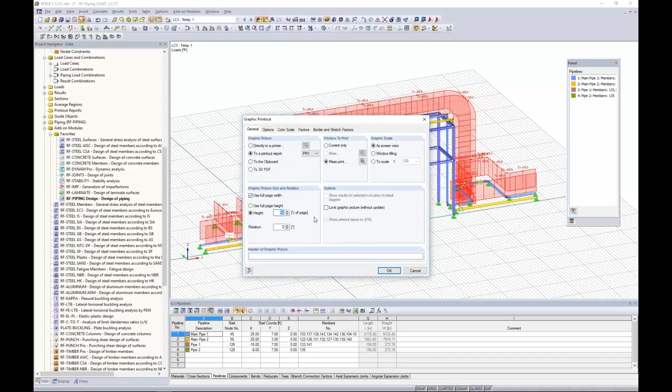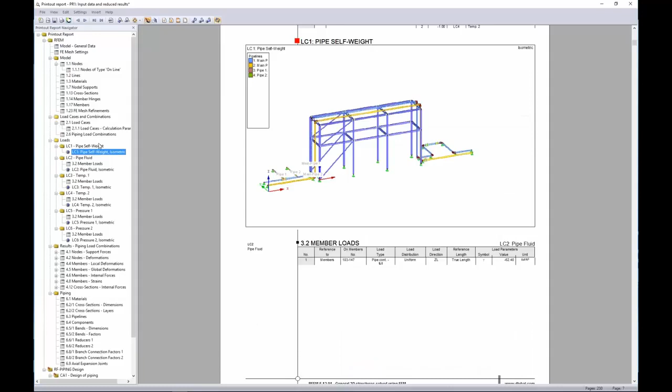Now the program says, okay, you haven't created a printout report yet, so let's set up a template. I click OK, and the program automatically jumps into an additional application showing our printout report. We have our table of contents on the left, and there are the pictures we just printed off. They're allocated into the correct location, automatically put into the loads section, and now I can scroll down to see my pipe fluid added here along with my table, temperature 1, temperature 2, and so forth.

And if I ever decide I don't really love the view of this particular picture, I can right-click to edit it, and maybe zoom in to just the section I'm most concerned with. I click back, and now this printout report, and in particular that picture, will automatically be updated to show that new view.

Something else extremely powerful is that these pictures are all synced up to our current RFEM module or file. So if I go back into RFEM and make any changes to these loads, the pictures will automatically be updated when I come back into the printout report, so I don't have to worry about reprinting those.

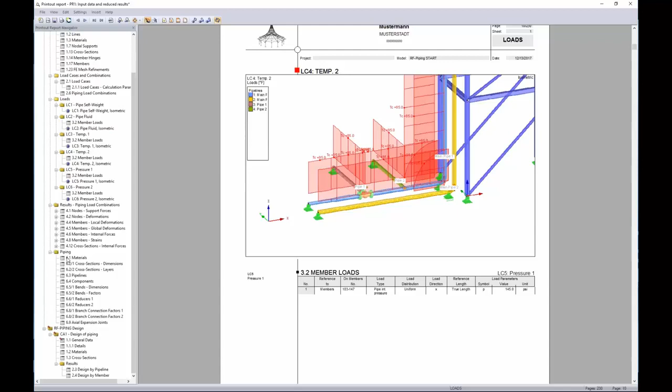As you can see, we have all of our input data for our supporting structure from RFEM, which would be our pipe rack, and then our input data for our piping system, including RF piping design. If we scroll down to RF piping design, remember I shared that we give you all the code references, all the variables, all the design internal forces. Not all of that has to be printed out. You can see here it's nice and short and sweet—we give you the controlling code reference, the controlling ratio, and that's really it.

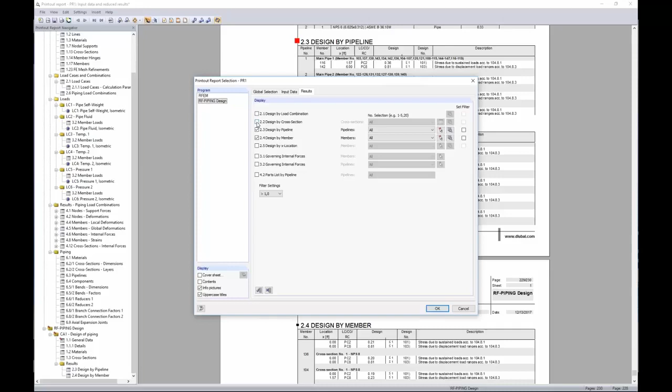But if you want to add more information, maybe this isn't complete enough for you, under Edit, Selection, for example, here's both RFEM and RF piping design. This is where you can uncheck and check boxes all day long to make it catered to what you want to include in your printout report. You can also save templates and use those on additional files, including adjusting your header and your own logo. So quite powerful when it comes to our printout report as well.

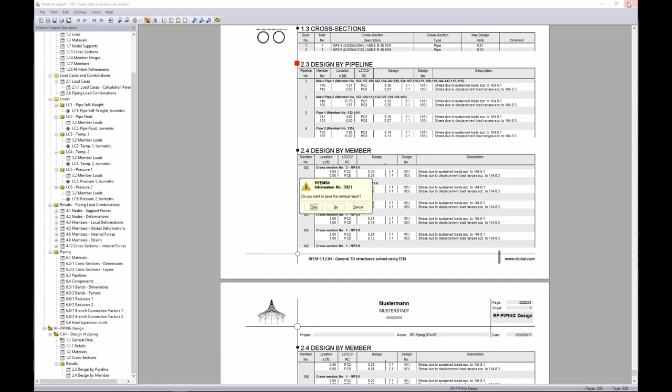Okay, so that concludes our webinar today. I will continue on with our PowerPoint. That was, of course, so much information within the last hour.